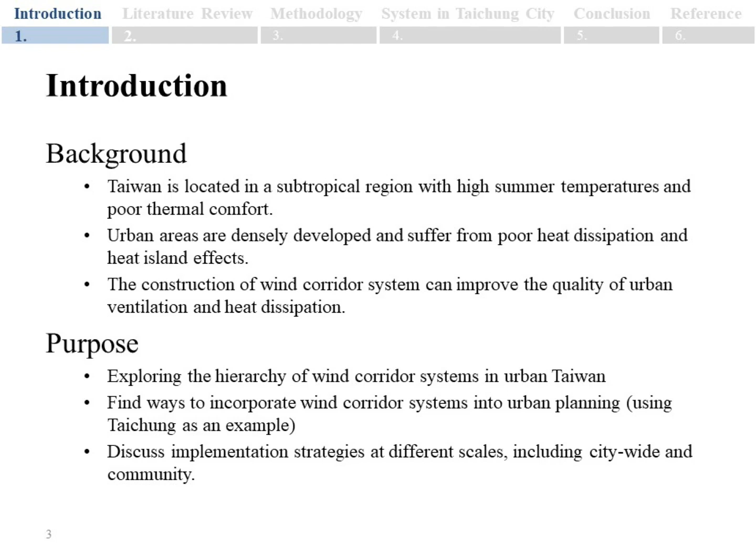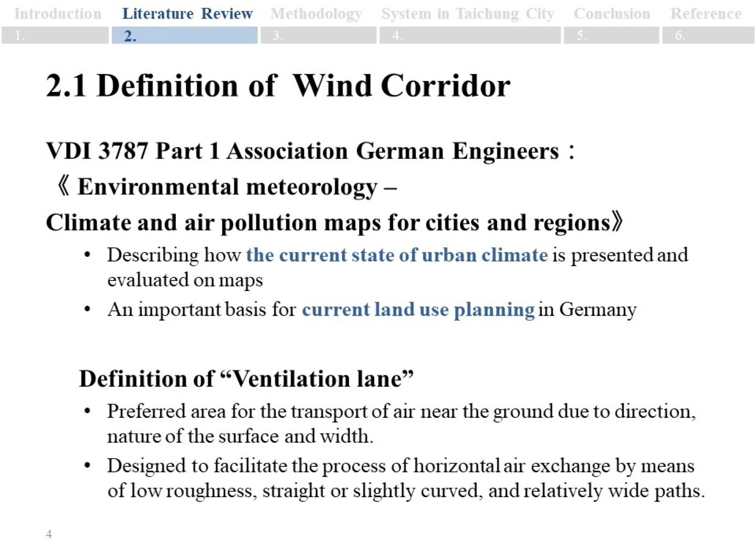According to the definition in the German National Guide, Environmental Meteorology, Climate and Air Pollution Maps for Cities and Regions, a ventilation lane is a preferred area for the transport of air near the ground due to direction, nature of the surface, and width. They are designed to facilitate the process of horizontal air exchange by means of low roughness lanes, straight or slightly curved, and relatively wide paths.

In addition, the China Meteorological Administration had also released the Climate Feasibility Demonstration Standard, Urban Wind Corridor. It states that the principle for the designation of wind corridors is using geographic information technology to overlay background wind conditions, ventilation potential, breeze volume, urban heat island intensity, and spatial distribution of green spaces. They construct two kinds of wind corridors in urban areas, called primary and secondary.

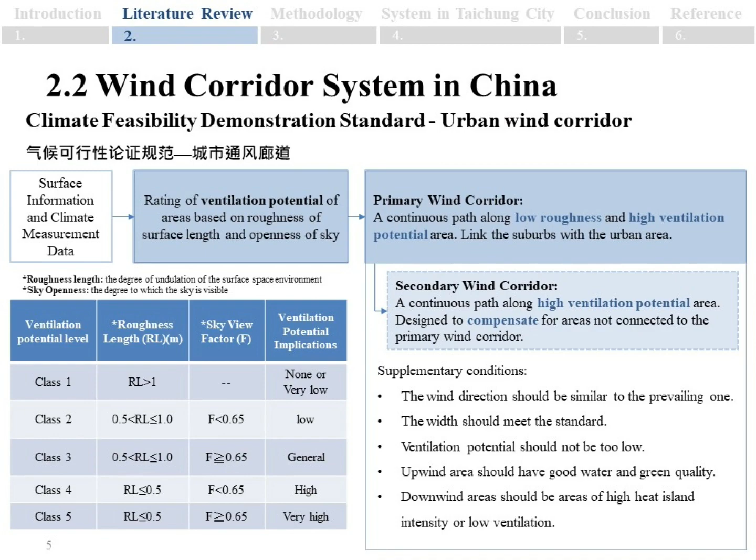Besides, a 2016 study by Hsieh et al. used the Frontal Area Index (FAI) and the Least Cost Path Analysis (LCP) to identify wind corridors. In conclusion, they suggested that the connection of wind flow between water and green spaces should be considered in urban planning.

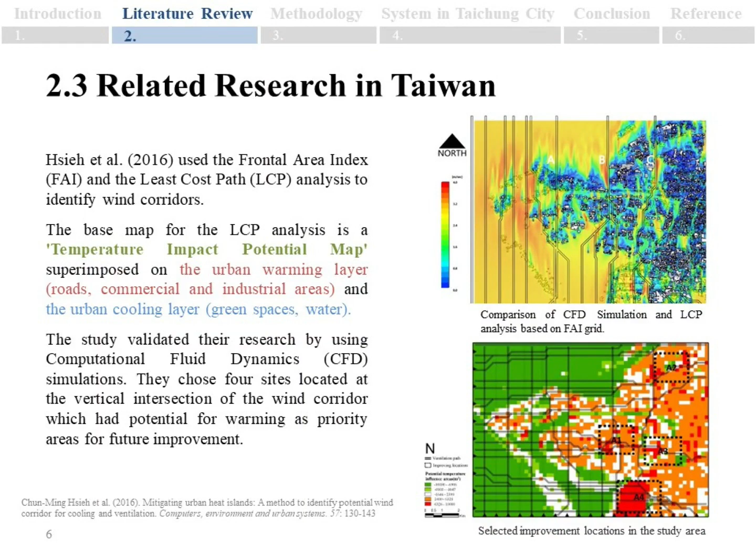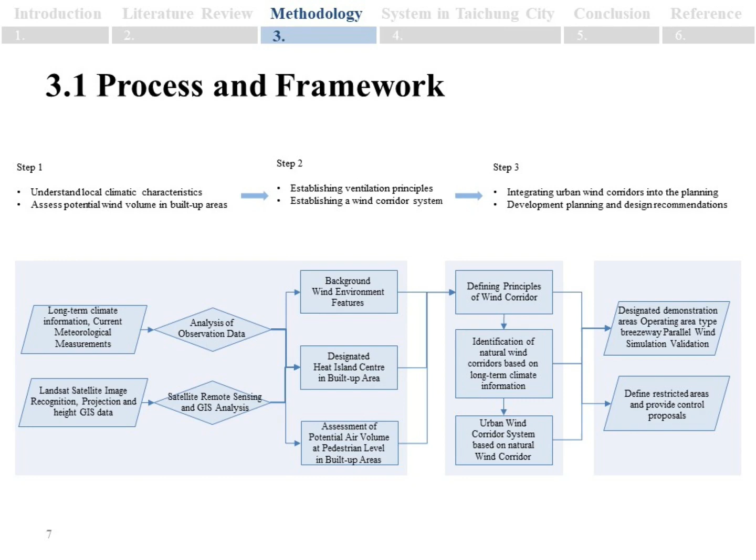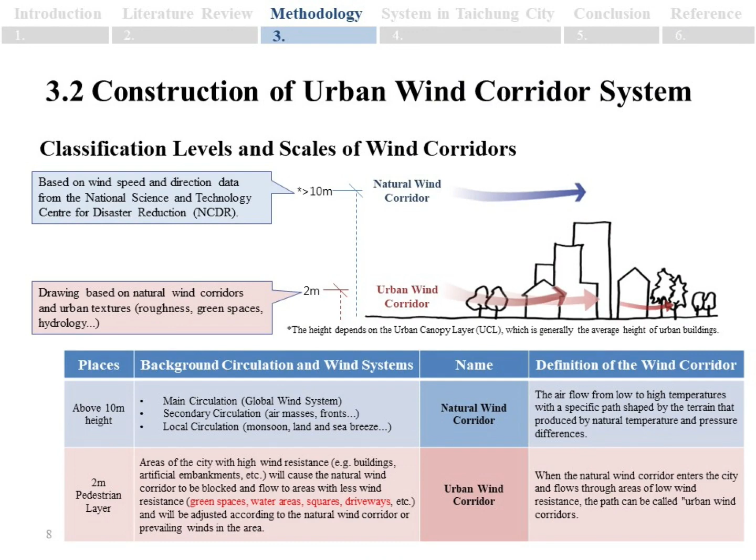We have distinguished wind corridors into two types, natural and urban wind corridors. A natural wind corridor is a specific wind flow from low to high temperature, created by natural differences in temperature and pressure, and shaped by topography. When the natural wind corridor enters the city and flows through areas of low wind resistance, the path can be called an urban wind corridor.

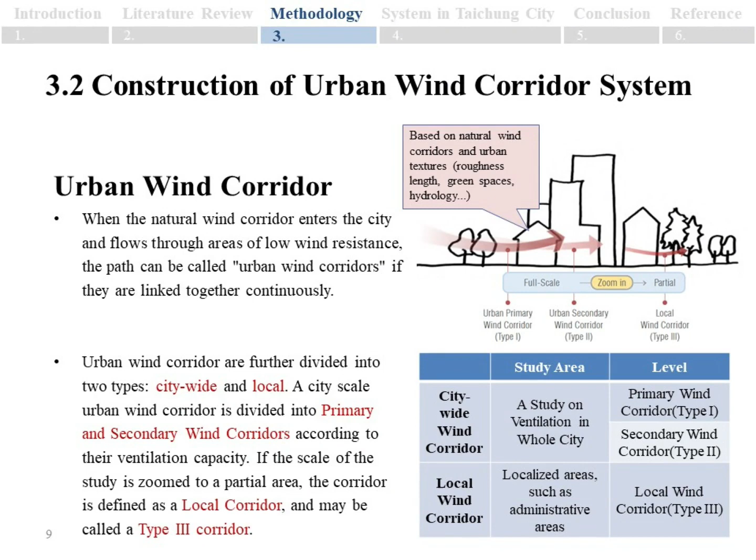Urban wind corridors are further divided into two types, city-wide and local. A city-scale urban wind corridor is divided into primary and secondary wind corridors according to their ventilation capacity. If the scale of the study is zoomed to a partial area, the corridor is defined as a local corridor and may be called a Type 3 corridor.

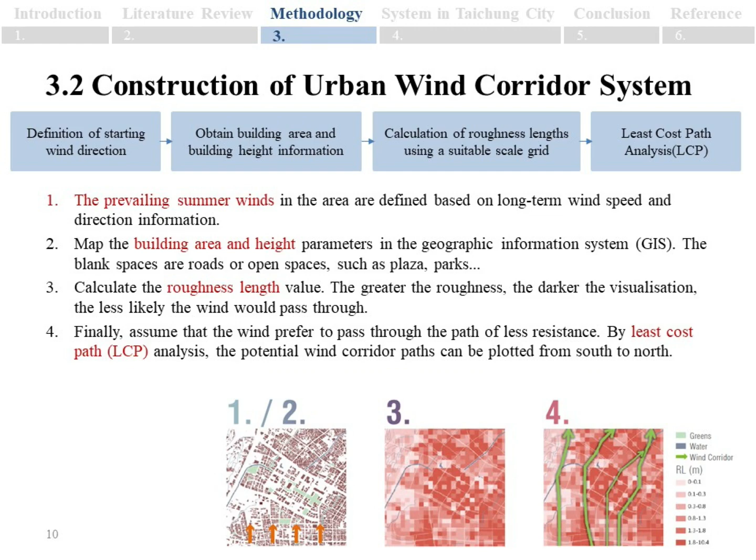So below I will explain the designation of the urban wind corridor system step by step. The first step in creating an urban wind corridor is to define the prevailing summer wind in the area based on long-term wind speed and direction. In other words, the presence of a natural wind corridor allows the creation of an urban wind corridor.

In general, the airflow during the daytime only enhances human thermal comfort slightly, while at night the temperature in the countryside drops significantly and cool airflow into the urban area facilitates urban heat exchange. Therefore, in this case, we have given priority to the summer nighttime wind direction while specifying the wind corridor system.

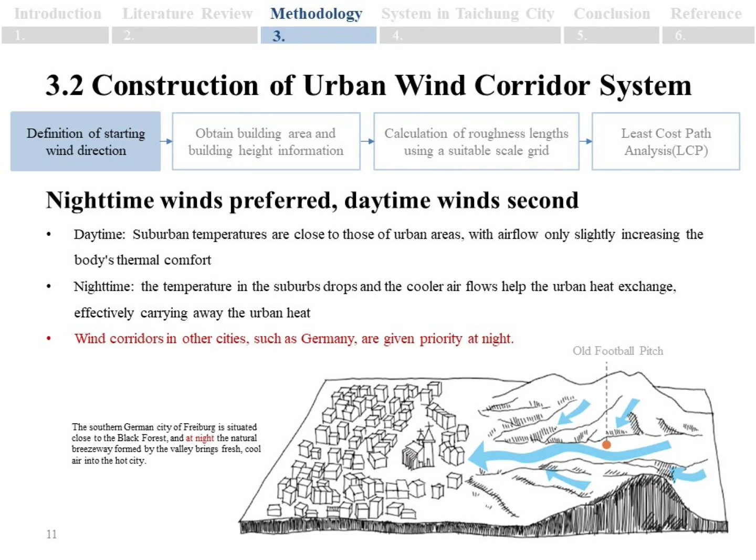Then, according to a combination of Landsat image recognition and cadastral data, we calculated the roughness length based on a suitable scale grid, as shown in the presentation on this page.

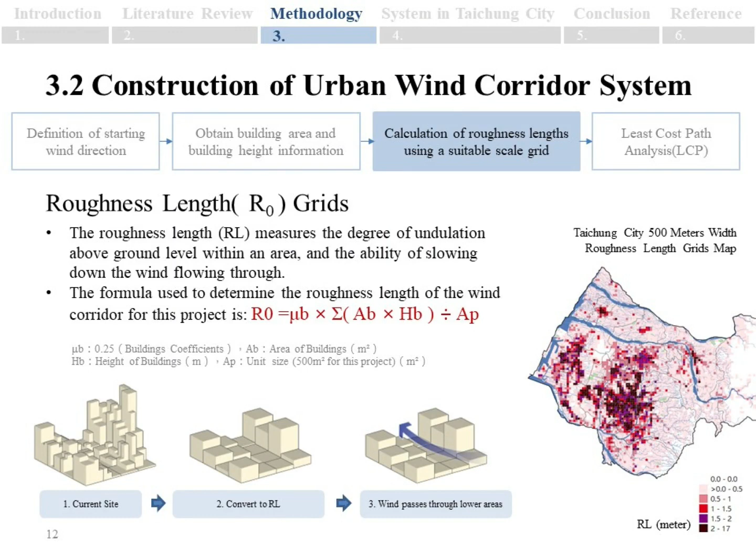After completing the calculations, we overlaid the visualization data with the geographical information layers. The paths can be mapped through the least cost path analysis and allow the wind to deflect in advance when they encounter large areas of high roughness, over 2 meters in this case.

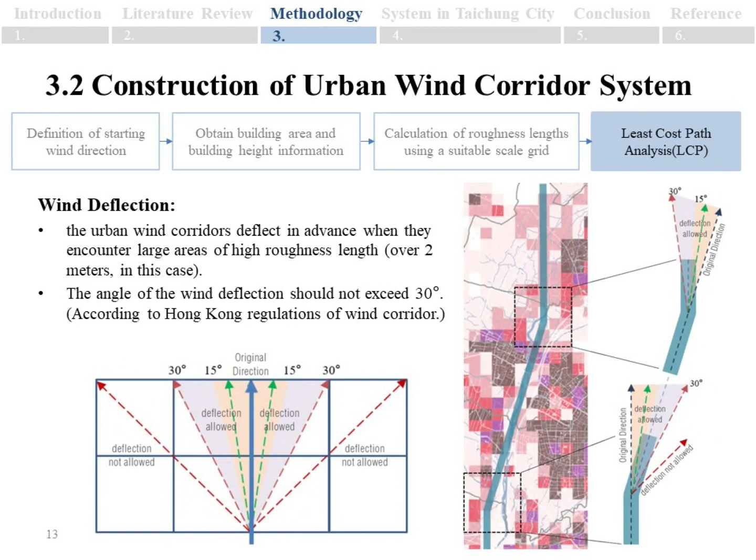To define the primary and secondary wind corridor, we calculate the number of high roughness length value grids that each route passes through. If a wind corridor flows along the rougher route, then it becomes weaker. The formula is shown on the page.

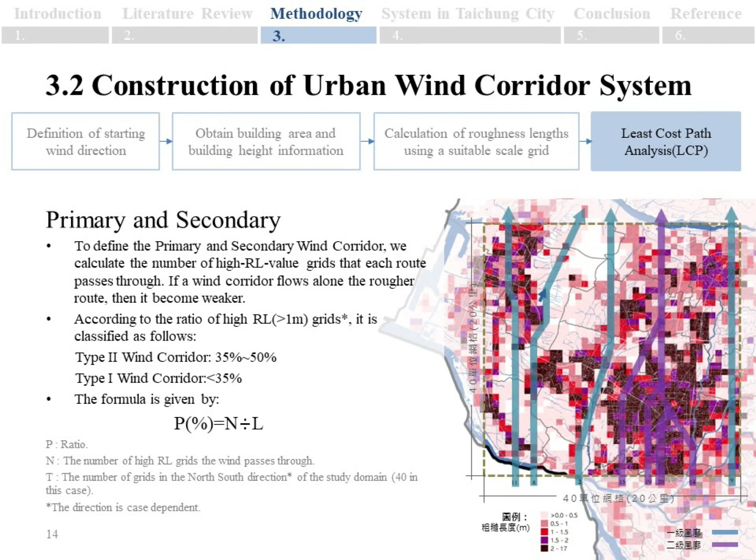Type 3 wind corridors are used to reduce the scale of study to a smaller block for the more specific implementation of the heat mitigation strategy. To identify the local urban wind corridors, the steps are the same as doing the citywide ones. The reference grid size was based on the study domain.

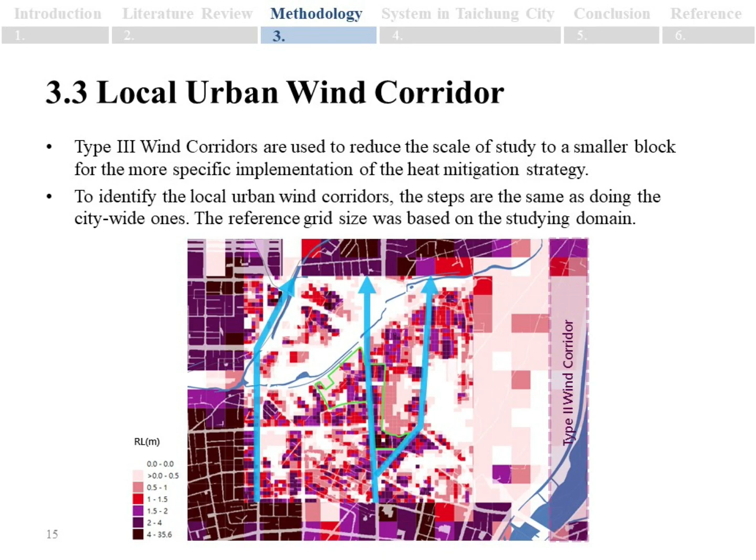At this scale, computational fluid dynamics (CFD) simulations were used to simulate the impact and variability of different cooling strategies on the environment, using the microclimate measurements as input parameters, which enable us to confirm the effectiveness of the cooling strategy.

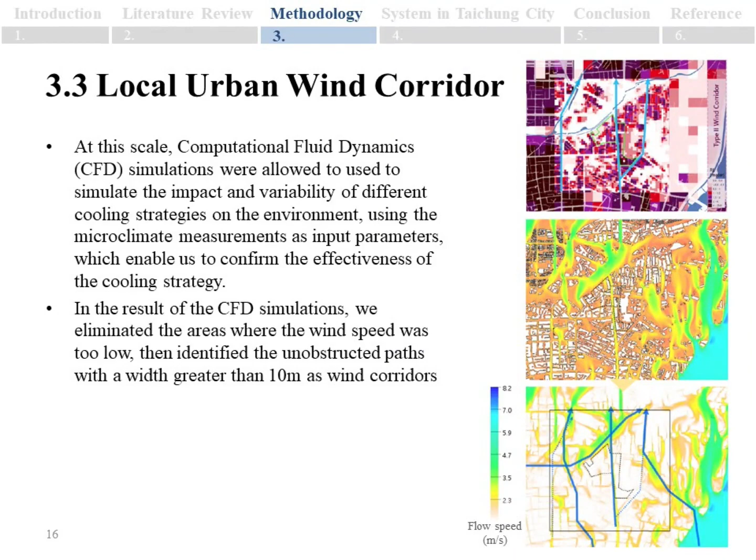Based on the methodology described above, we have identified several natural wind corridors for Taichung City, as shown on the map.

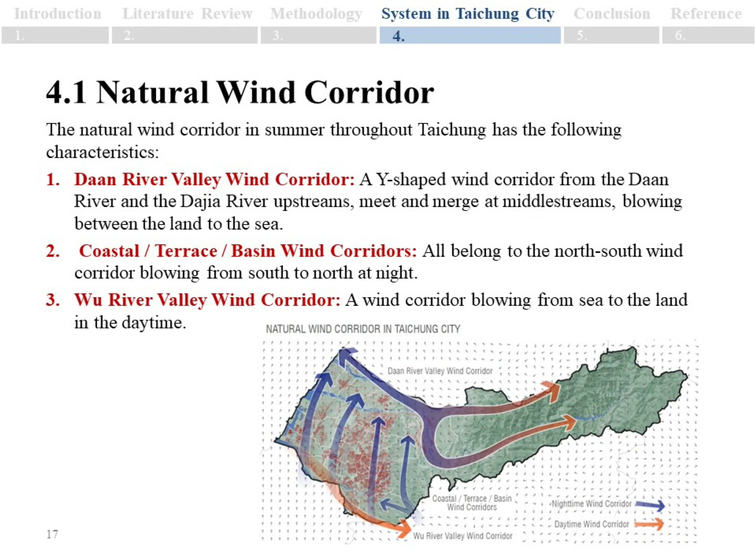We choose the wind from the south during summer nights as the main wind direction for the urban wind corridor in Taichung City. The study area was defined as a 20 by 20 square kilometer area in the city center. The result of the designation and construction are shown in the figure.

Although it is estimated that the average wind speed of the Type 2 wind corridor is lower than that of the Type 1 wind corridor, since it is located in the core area of the Taichung Heat Island, we believe that it has a high cooling benefit.

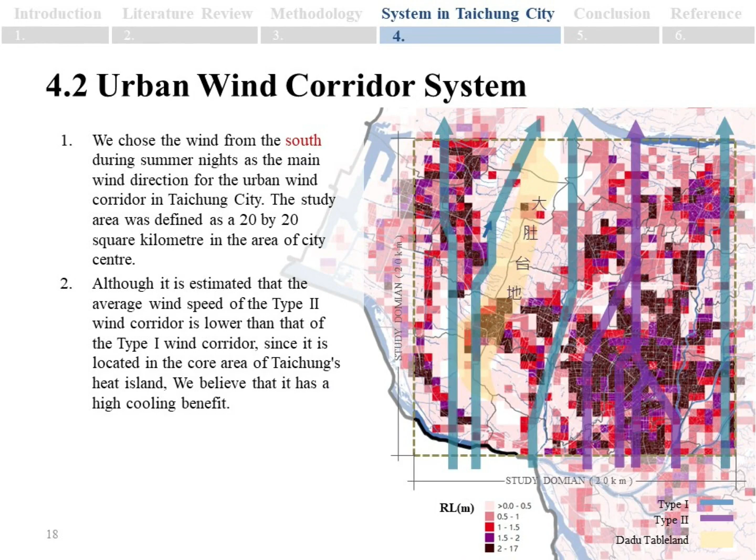In terms of the local scale, two methods and tools, namely the roughness length grid least cost path analysis and computational fluid dynamic simulation, were used to identify and compare the local urban wind corridor. The results were verified to have a certain overlap rate.

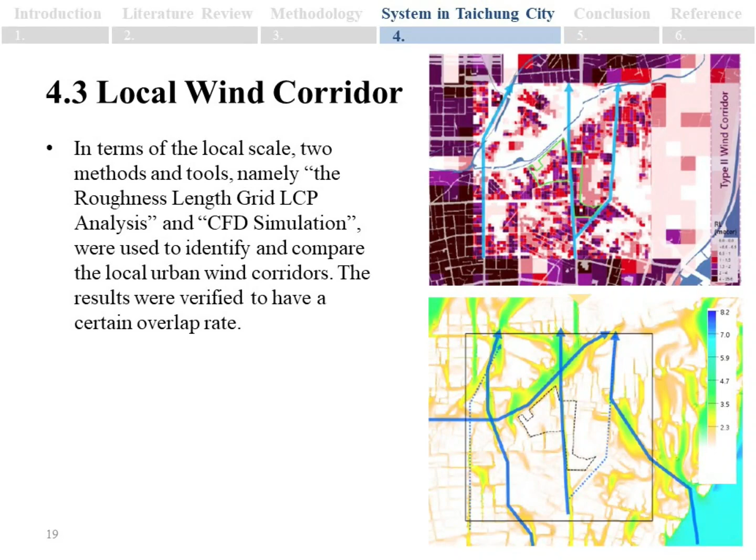The result of the research above will facilitate more specific urban development regulations, for example, the volume of development and the standard of regulation, and so on.

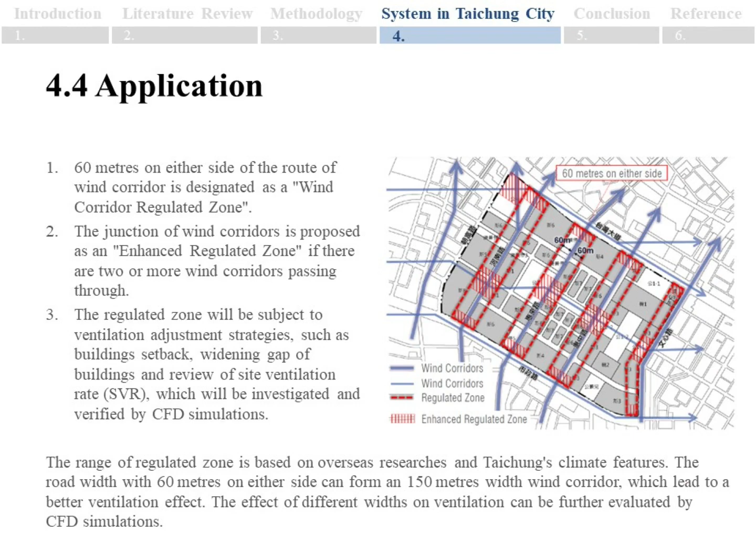The study concludes that the advantage of the least cost path analysis of roughness length grid is that it is fast and has some accuracy. CFD simulation can also be used as an identification method for wind corridors, but it has proven to be relatively costly. It was also found that...

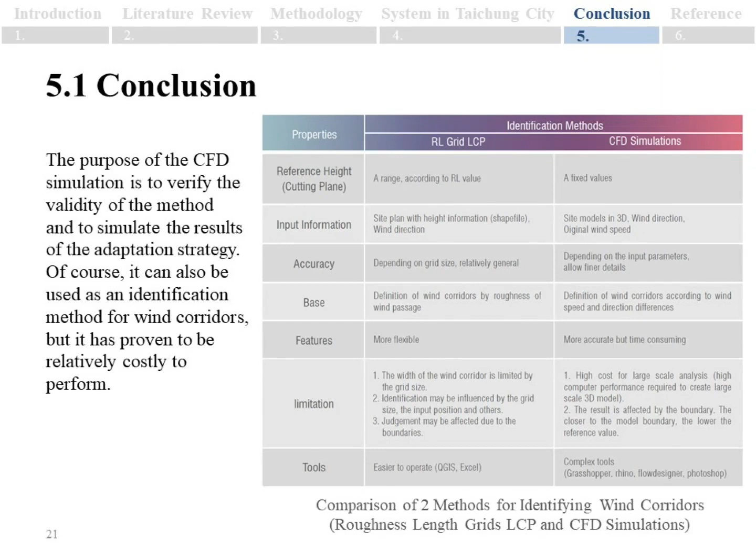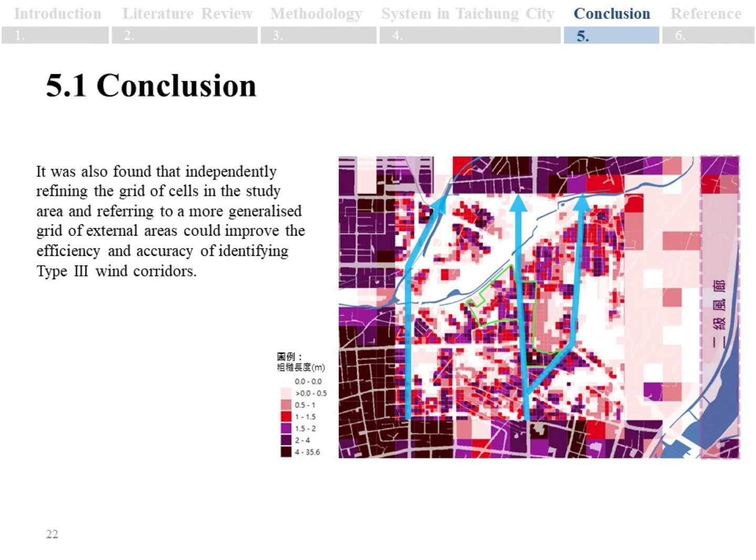Independently refining the grid of cells in the study area and referring to a more generalized grid of external area could improve the efficiency and accuracy of identifying Type 3 wind corridors.

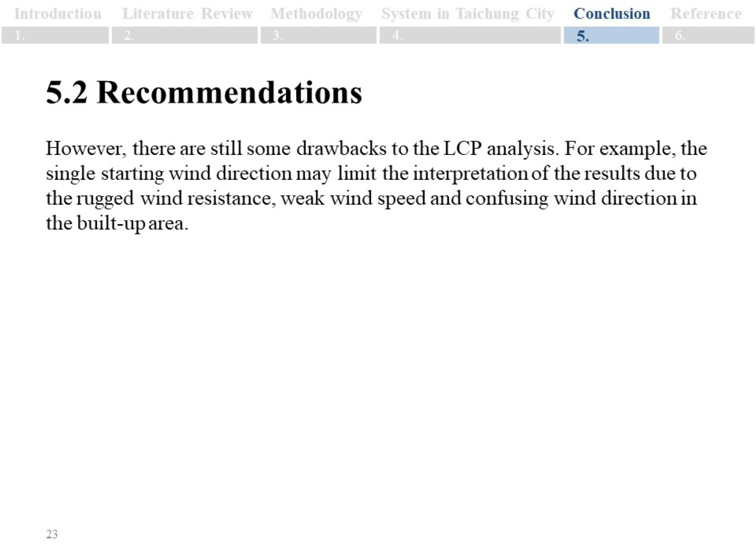However, there are still some drawbacks to the LCP analysis. For example, the single starting wind direction may limit the interpretation of the results due to the situation in the built-up area. The above is a brief description of this paper.